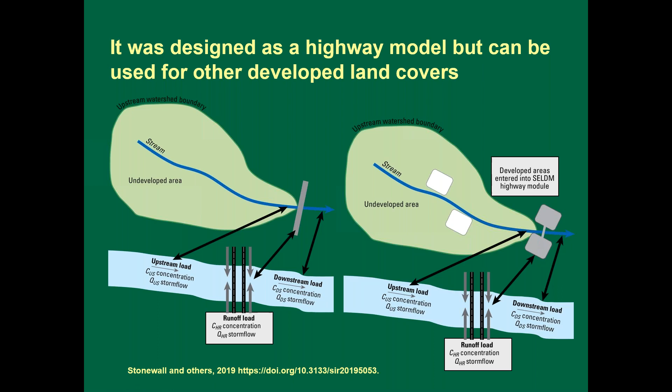So SELDM has been used in TMDLs. We did a study for Caltrans where we came up with yields—that's pounds per acre, loads per unit acre. So then they can use GIS to figure out how much land they own, what the other land covers are, how much of this contaminant they're putting out, and figure out where the state highway system fits in that basin.

So this is the Willamette Basin in Oregon. We did total phosphorus yields and multiplied those by the areas of the different land uses. You can see the forests in that case were about 20% of the total annual phosphorus loads. Agriculture was almost half, and developed areas were about 30%. The entire state highway system was only about 2.5%.

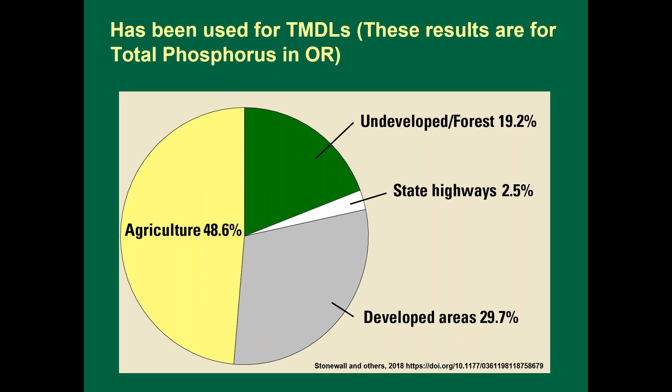So if in this basin they had to reduce phosphorus by 10%, you could rip out all the state highways and not get to your target. So the DOT alone could not satisfy the TMDL. SELDM is the recommended method by the NCHRP, National Cooperative Highway Research Program, Report 918, for doing highway-related TMDLs.

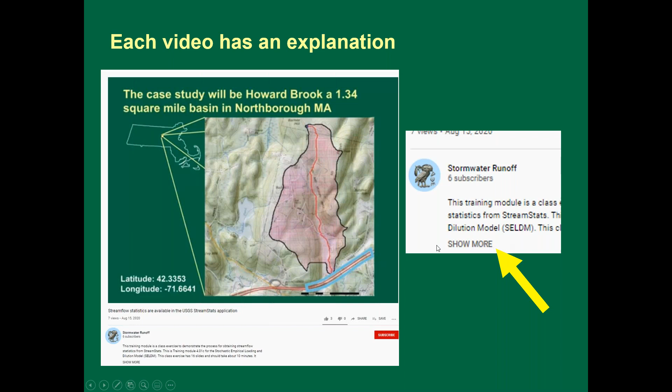If you look at the YouTube page, it may not always be clear, especially on a phone, but each video has an explanation. If you hit the show more button, you'll get the full thing. We tried to put in more information, but also references. If you're interested in something in the video, and it's not a webinar but one of the teaching videos, it should have the references involved.

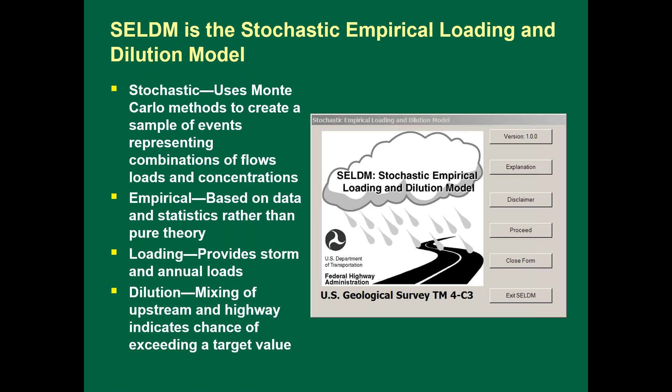I covered this in the intro, but we'll talk about it again because it's important. SELDM uses a simple mass balance approach to calculate flows, concentrations, and loads by storm and by year. So again, you have the upstream load.

It's a random population of concentrations, a random population of storm flows from the upstream basin. You have it from the highway, or if you have an urban area or a highway maintenance facility discharging to a stream—again, concentrations and storm flows with and without BMPs. They add the components together to get the downstream loads and flows, and you divide the load by the flow to get that population of downstream concentrations.

So by getting a population, you can then assess what's the risk of exceeding this water quality criterion, or this loading level I don't want to exceed.

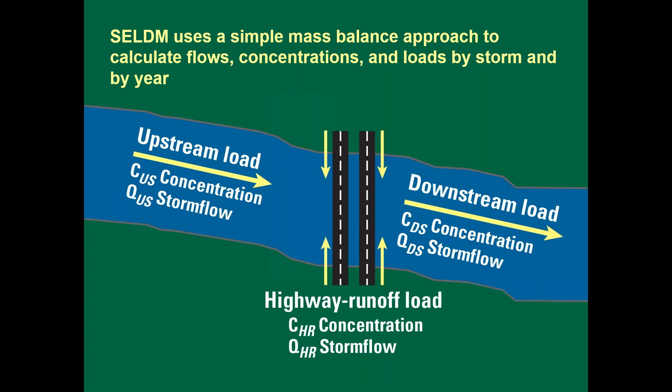Because it was designed for NEPA, but it's also useful elsewhere, SELDM is designed to facilitate what's known as scenario tests and sensitivity analyses.

So a scenario test might be: I have a highway going over 5 streams, so I want to look at what's happening on each stream. Whereas the sensitivity analysis might be: let's say I have high, medium, and low highway runoff concentrations from 3 other sites, and I don't know which one I want to use.

So I could run 3 simulations where everything else is the same, except I vary the concentrations, and see how important that input concentration statistic is in affecting the answer that I get.

So SELDM has an organization for doing the work. First you have a project. Now a project could be an actual highway project that might have several outfalls, or a project where you have different alignments you want to try.

Or like I said, you might be saying, well, if I do this or that, or if I have the pre-development condition, or before I add a lane to this site and after I add a lane, those would be two conditions that might be under a project. So those things I was describing are what's known in SELDM as analyses.

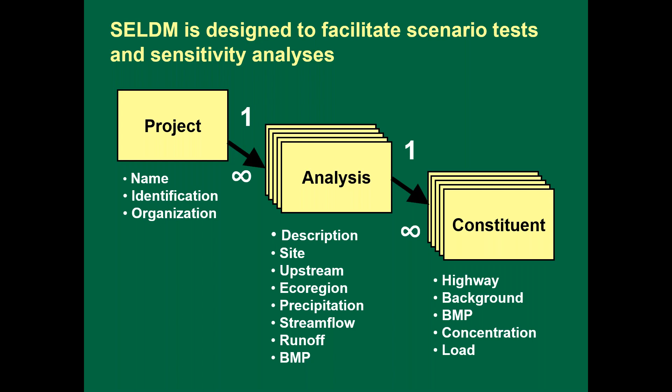SELDM was designed to support the environmental decision-making process, so what we want is a kind of tiered analysis. Like I mentioned, the bridge over the 5,000 square mile river - you may not want to expend three weeks of work to get to the point of... well, you should never spend three weeks doing one SELDM analysis. Hopefully you'll see that.

I guess being a little hyperbolic, but you don't want to spend a lot of time at sites that have a really remote chance of having a problem. You want to focus more on sites that might have a problem and what you can do to mitigate or eliminate that problem at that site.

So SELDM has this first level analysis where you have regional inputs. This is based on hydrologic similarity, so you're saying sites within a region are similar to the regional values. In SELDM, we use the level 3 EPA ecoregions as one of our regions for pre-storm flow, precipitation, and water quality. In the USGS, water quality is QW for some weird reason.

You also can use rain zones - EPA has 15 rain zones across the country. Ecoregions tend to be a little smaller, more focused, so we rarely use the rain zones themselves.

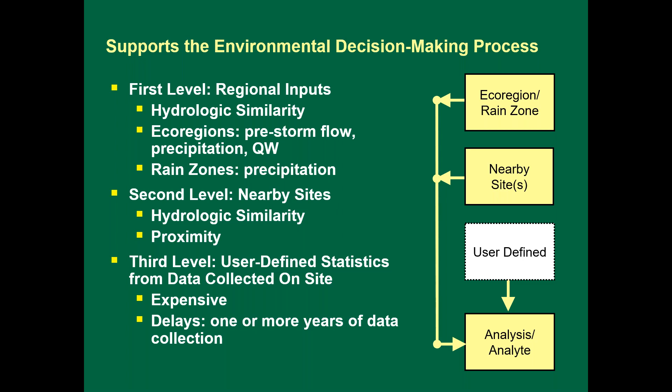So what happens is the same precipitation, the same events, occur to the upstream basin and the highway site.

So for the highway site, we generate a bunch of runoff coefficient statistics. It's not the same runoff coefficient in every storm. You can put in your own runoff coefficient statistics, but generally they're associated with the imperviousness of your highway and your upstream basin sites. So precipitation times runoff coefficients gets you your highway runoff flows.

For your upstream basin, there are 2 components. You have the pre-storm stream flow, what's in the river before the runoff starts. And again, similar to the highway runoff site, you have runoff coefficients based on the upstream imperviousness, and the input precipitation varies randomly to get the flow.

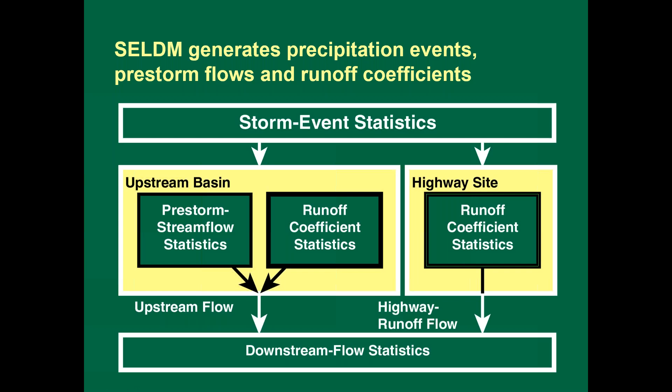So your upstream flow is the pre-storm flow plus your runoff hydrograph, and you add the upstream and highway runoff flows together and get the downstream flow statistics. So it's fairly basic in that it's basic mass balance, addition, subtraction, and division. The power comes from statistically representing the hydrology of the system.

We didn't want to build a model that was tough to run, so we did a lot of the work for you. You need statistics to run SELDM, but we've calculated them and made SELDM a database application, so all the information will be there for you. You can click on things to pick them - there's drop-down lists.

This image shows our precipitation stations. The pastel polygons are the 84 U.S. EPA level 3 ecoregions, and the black line polygons are the 15 EPA rain zones. I generally go to Nevada to talk about this because there's a low density of rain gauges there. You can see we're in rain zone 11, which covers a lot of ground, but a lot of arid ground kind of inland there.

This pinkish pastel ecoregion is the basin and range ecoregion. So if I was in this area of Nevada where you can see these 3 rain gauges, I could either use the average or median of statistics from rain zone 11, from the basin and range ecoregion, which would be the average of all these dots. Or if my site's here, I could say my site is most like one of these 3 dots, or I could take the average and median of the 3 dots.

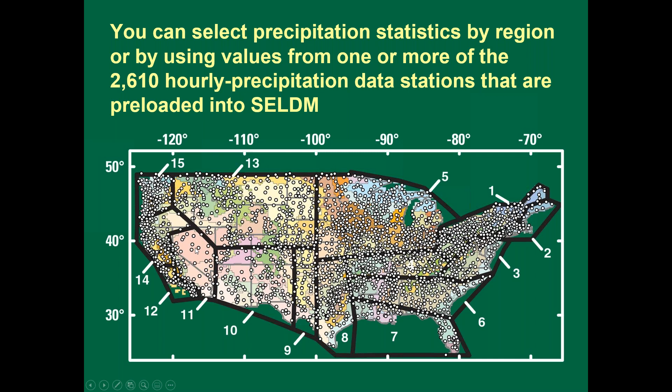Similarly, we did statistics for you from 2,783 stream gauges and preloaded them into SELDM. After SELDM was developed, we did statistics for about 20,000 stream gauges nationwide. So if you go to StreamStats in your state and click on a stream gauge, you will get the SELDM statistics for that stream gauge, and you could enter those into SELDM.

Similarly, we didn't use rain zones for stream flow, but if you look at Nevada, you can see this little cluster of sites in the middle of the state. If I'm in this area, I can either use the average of the basin and range stream gauges - looks like there's 4 stream gauges here - or I could pick 1 or 4 of these to try and get my stream flow statistics for this site of interest.

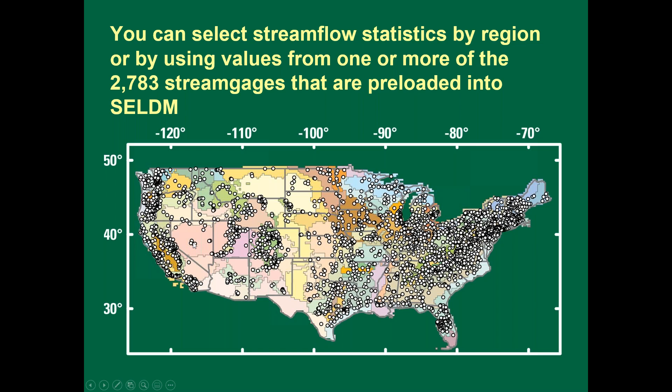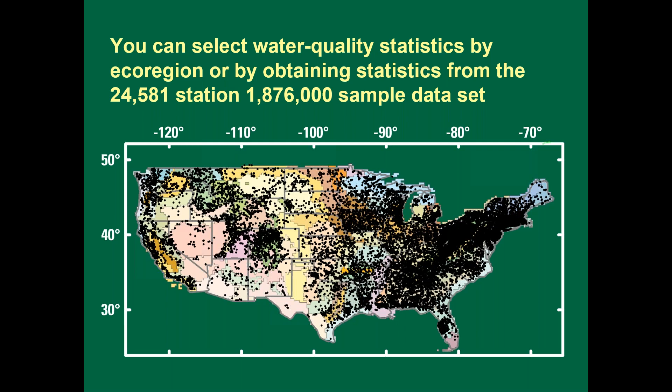For background water quality statistics, we did data mining from the USGS National Water Information System, and we've got about 2 million samples from 24,581 water quality monitoring stations nationwide. Unfortunately, not everything was measured in every station. Total phosphorus and suspended sediment are the top 2 nationwide - about 30% of these stations have one or both of those constituents. Once you start looking at total metals, you get down to about 10% of stations nationwide that might have copper, if you're interested in copper.

Back to hydrology from water quality - so SELDM is generating these events. It's generating the pre-storm flow. So when we look at a runoff hydrograph, it also simulates the timing of runoff, but it does it in a fairly simple manner.

It uses a triangular runoff hydrograph. So we can see in this diagram on the left, we see runoff volume and time. The pre-storm upstream flow stays constant, and we have this triangular upstream runoff. That's the duration of the runoff hydrograph, and that depends on the length and slope of the stream basin and the imperviousness of the upstream basin.

Let's imagine the lower left shows 2 runoff hydrographs: the short, sharp peaked one is highway runoff, and the longer, lower triangular one is if you put in a BMP. If you have this upstream runoff hydrograph alongside the highway runoff, at duration 1 you're only in the rising limb, whereas with a BMP that stretches out the highway hydrograph, you get out to duration 2, so you get more dilution. We didn't want to cheat and say the highway gets all the dilution from the upstream basin - it only gets the portion that would arrive while the highway was discharging.

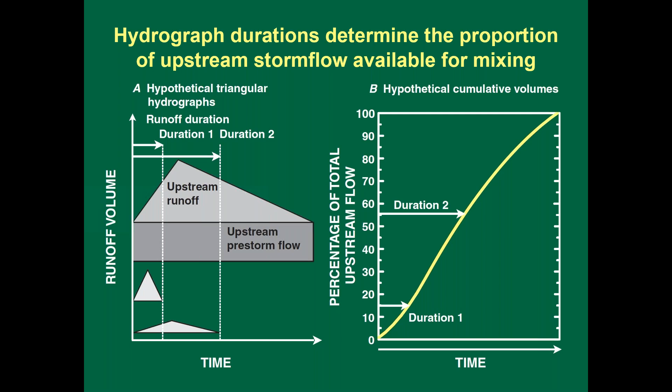SELDM was developed as a highway runoff model, but it can be used for many types of sites. When we put in our highway site, SELDM is simple to use because there are just 5 properties we think about - actually really only 4 properties.

What we need is drainage area. In this picture of these 2 bridges on the Charles River, we see the drainage area - if only the bridges are draining to the stream - is encompassed by these 2 yellow polygons.

To get the timing of the runoff from the highway, we use the main channel length and slope. For a bridge, the main channel goes from the crown of the road to the scuppers, and the slope is the camber of the road from the crown to the scuppers.

The other thing we look at is the imperviousness to get the runoff coefficient statistics, and we see the bridge is 100% impervious.

Then we look at a literal site versus a conceptual or hypothetical site. When people are worried about water quality in this stream, they're not necessarily worried about what's happening between these 2 bridges on the same highway - they're more likely worried about what's happening downstream of both bridges.

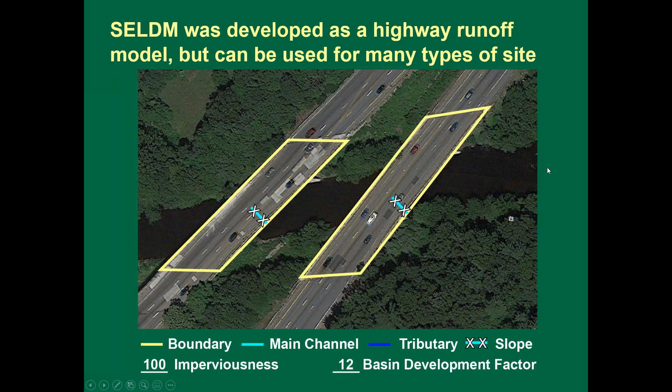So again, it's just a drainage area, imperviousness, the length of the main channel, and the slope, the main channel slope between points that are 10 and 85% up the channel.

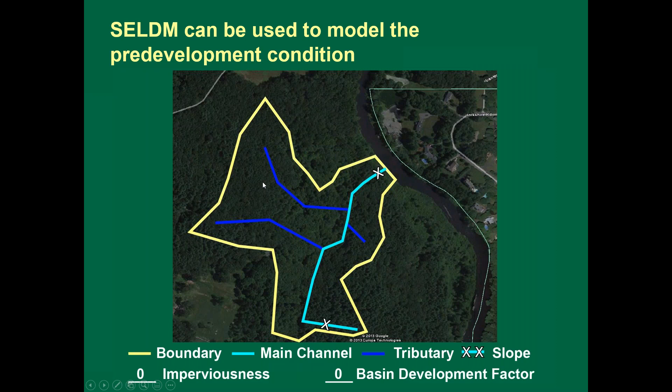Let's say there's a roof drain and you've got just a vertical drop down into the sewer system, you wouldn't really count that part of the fall because the flow is instantaneous.

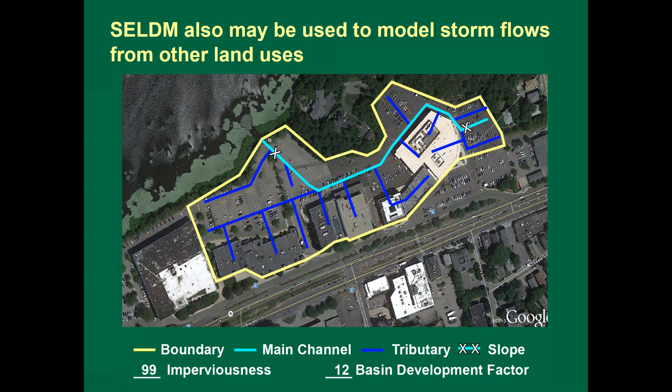So today, hopefully we'll get through a case study. It will be Howard Brook, a 1.34 square mile basin in Northborough, Mass, near where my office is.

So we're going to be trying to run SELDM with this section of 290, which is within the blue polygon, and it stretches from drainage divide to drainage divide, and we're assuming all this area gets into the stream right here. This is an image from an older version of StreamStats where the black line is the basin divide and the red line is the main channel.

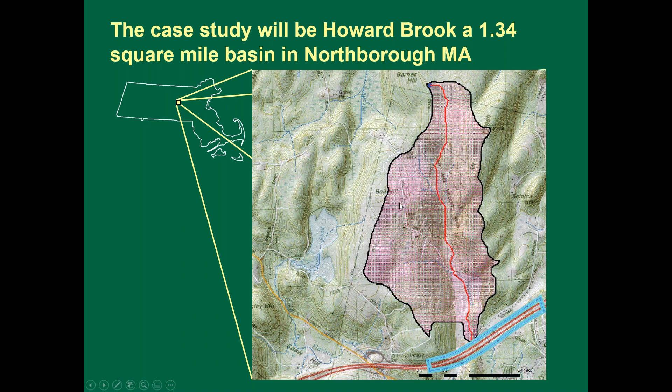When you run SELDM, it generates thousands of storms, or 1 to 2,000 storms. This is for Southern Massachusetts. We used highway runoff database information from a Massachusetts study, so we put these statistics for these highway runoff sites into SELDM. It runs all these events and we get this population.

So when you're looking at this graph, the vertical axis is total phosphorus on a log scale, and the horizontal axis is a probability axis. You can see it's kind of weird that 98 and 99.5 are close, but when you go to 99.99, there's a large space. So the probability axis stretches out the extremes, because that's usually what we're worried about.

So the gray circles are the highway runoff, total phosphorus from the pavement surface. We can see that rarely we might get up to 1 milligram per liter from the pavement surface, and in a few storms we get down below 0.01. We're not simulating individual storms, but conceptually that could be you have a gully washer that rinses off the highway, then another event afterward where there's not much buildup, so you could get low concentrations.

So these yellow diamonds are the concentrations you would get out of a grassy swale. We can see that the grassy swale doesn't make a huge difference in the concentrations, and when highway runoff concentrations are low, the grassy swale could be higher than the highway runoff concentration. That makes sense: if you have quote unquote clean pavement and the runoff is running over grass and dirt in a swale, you might tend to pick up some phosphorus.

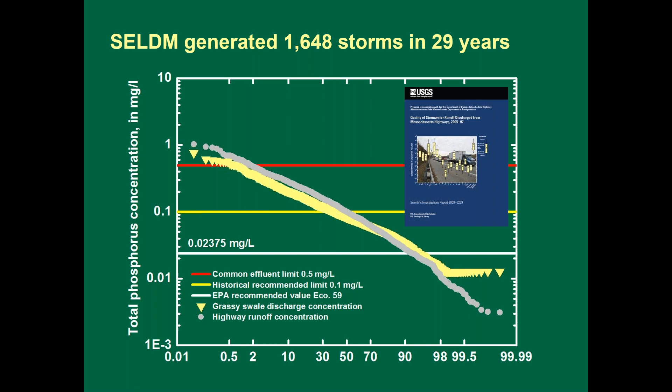However, if you apply the same standard they're applying to municipal dischargers to the highway, you can see highway runoff is going to exceed that maybe 3% of the time, but if you put in a grassy swale, it drops it down to about 1% of the time. So in terms of concentration in the effluent, the next question is obviously, what's it going to do in the stream?

SELDM gives you that information as well. SELDM provides background water quality concentrations, and you can simulate that. What we have here, the blue stop signs, are the regional values in SELDM for total phosphorus in the Northeast region, Northeastern coastal zone. We see there's these different stream basins that we have data for. This one down here is actually the lowest one, is the outflow from a large drinking water reservoir, as if they had a big wet pond treatment with a 6-month residence time. This is the phosphorus you would get from that.

Again, we simulate all these events with the available statistics, and what we get is this population of events. We can see that based on regional statistics and these 3 streams shown in yellow, if you're applying that 0.02375 milligrams per liter, even the best stream is going to exceed that about 70% of the time. The regional values would estimate about 85 to 90% of the time, and then this one tributary exceeds this standard more than 99.5% of the time.

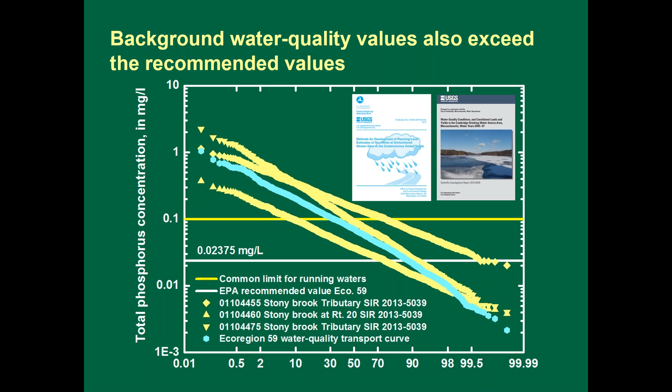So what we're showing here, we just showed you highway, then we showed you upstream, and this is what happens downstream. Again, we have our total phosphorus on a log scale, we have our probability scale. The blue stop signs are upstream, and the green triangle pointing upward is downstream concentration without a BMP. The yellow triangle pointing downward is the downstream concentration with a grassy swale, and the highway runoff concentrations are gray.

So we can see that at the lower concentration, from green to yellow, there is a shift from left to right, reducing the probability of exceeding. But the highway runoff concentrations aren't that much greater than background concentrations, and although there is a shift, you're still exceeding this lower standard 90% of the time.

You go to 0.1, we can see that the highway exceeds more, but the upstream, downstream, with and without BMP isn't making a big difference.

And then you just follow the probabilities up to the highest concentration. You can see at this site, putting in a BMP is not going to make a big difference for total phosphorus. So if you only have so much money to put into BMPs, you might be wasting your money here. That's not to say that for total copper it might be a totally different story.

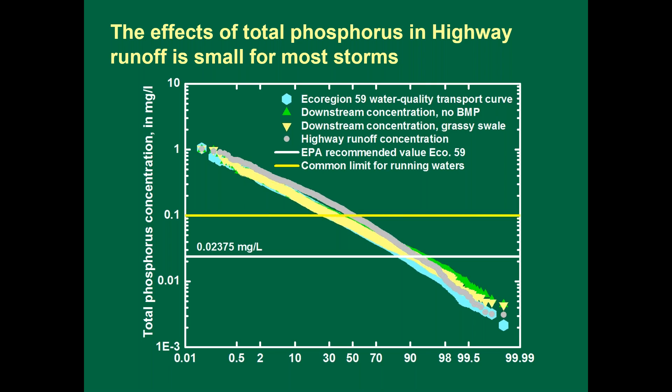All right, and so this is a schematic of the Scituate Basin. When we're talking about sites, if you're looking at annual loads or a lake analysis, your highway site can be more hypothetical because you're not looking at event by event, so you're not worried about the timing of runoff for individual events.

So if you had like a reservoir basin, or if you're looking at, let's say this was an estuary and you were looking for the total highway runoff concentration of some constituent, then you would use maybe the whole highway area.

So in the Scituate Basin in Rhode Island, if we're looking at chloride, for example, when chloride gets into the groundwater, it gets into the Scituate Reservoir sooner or later. So if we're looking at long-term loads and yields, and what's going to happen over a long period of time, we'd probably use the whole road network area to figure out how much chloride is going to end up in the Scituate Reservoir.

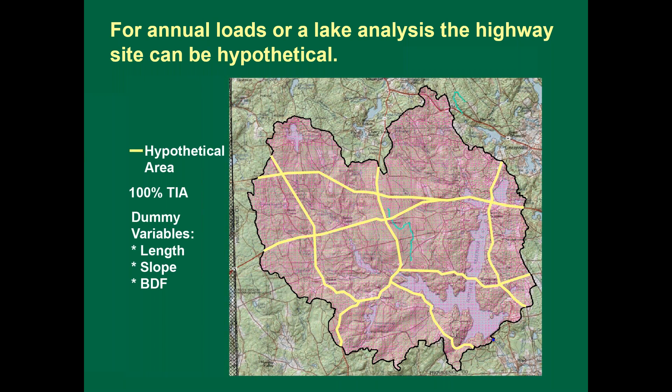You're getting some good infiltration. So between knocking down the highest concentrations that you would see and knocking down the flows, you get like a 50% reduction in load. SELDM is kind of good at this - if you look at the International BMP database, they do a great job of looking at concentrations, but they don't really address loads. So SELDM helps you put all that information together to get a better answer.

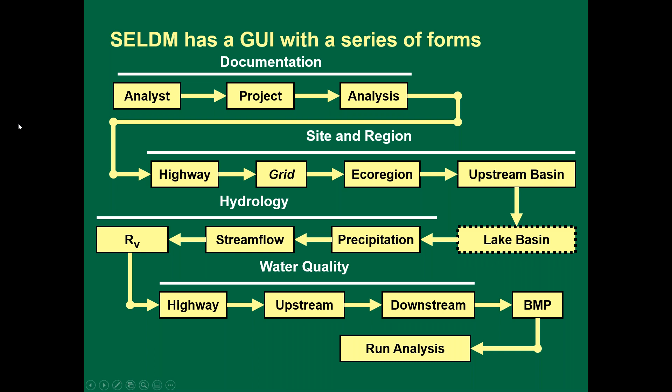This conference will now be recorded.

Okay, great. So SELDM is a database application. We did that so you wouldn't get bogged down building these complex input files or entering a huge amount of data or statistics. And once you set something up, it would be self-contained. So if you're doing something that somebody else has to review, you can give them this one file and it should run for them as it runs for you.

So when you open up SELDM, it's a Microsoft Access database application, and you can see it's got this little cute opening screen. It gives you information about the version. If you click this button...

We have our explanation. One thing is, consistently, it comes up and it's highlighted this way so you can copy it in. You can go large font, which is just kind of a toy, I guess. But as you move through, if you have to write a report, you can copy stuff right out of the explanations and use that. So this just talks about SELDM itself, but I'll show you more as we get in.

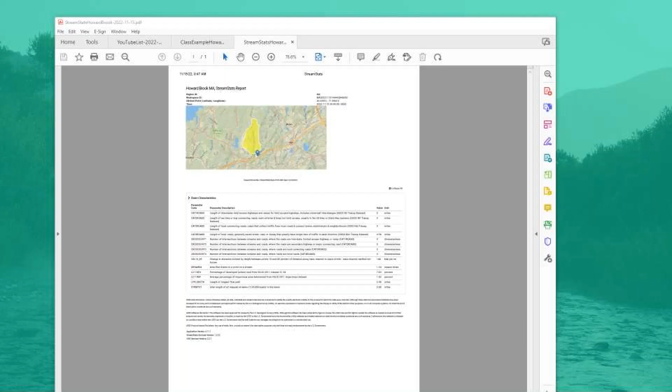Okay, so your highway site characteristics. Let's see, hopefully I left some of this... In the folder that I directed you to, there was a folder called First Run, and we could see there's a class exercise.

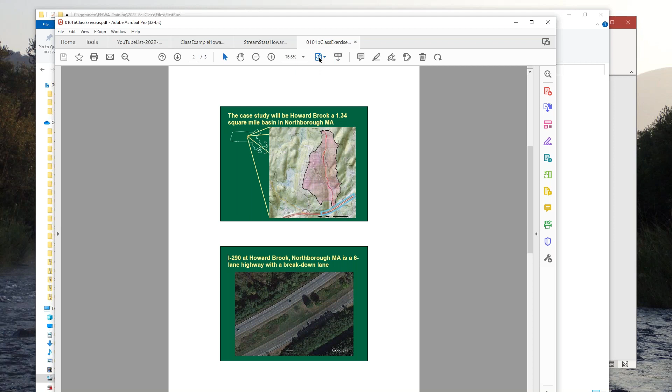So this is a presentation, but I wasn't going to give it, but let's see. So basically, I showed you the map of I-290 and Howard Brook.

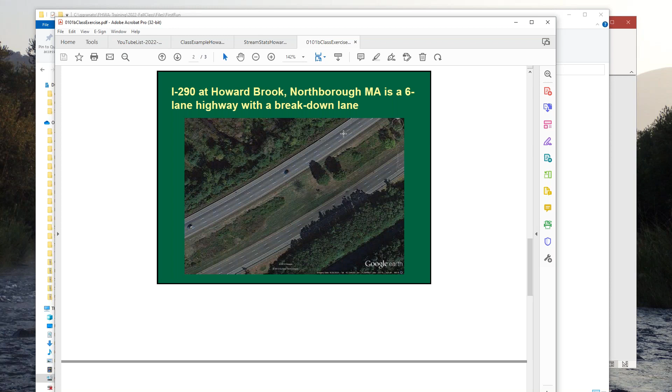Basically, what we did was, in most areas, if the highway is existing, you can go to Google Earth and use the measuring tools there. We can go through that on Thursday if people want to dive deeper. But you can get, hopefully you have highway plans, but if you don't, you can use Google Earth to figure out what your highway site looks like.

So what we end up with for basin properties for the highway: we have latitude and longitude, area, channel length, slope, impervious fraction, and originally we did this basin development factor, but we're going to use that cheat code to use imperviousness for our basin development factor.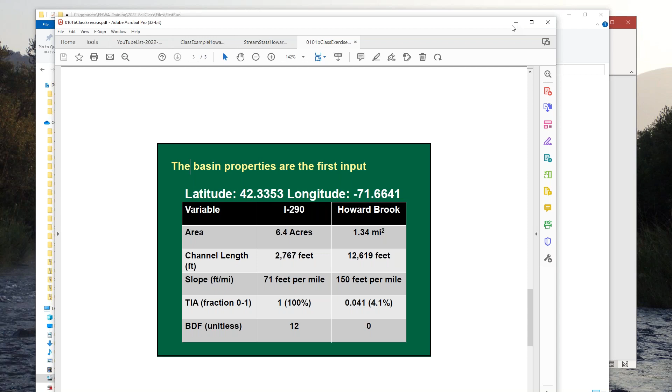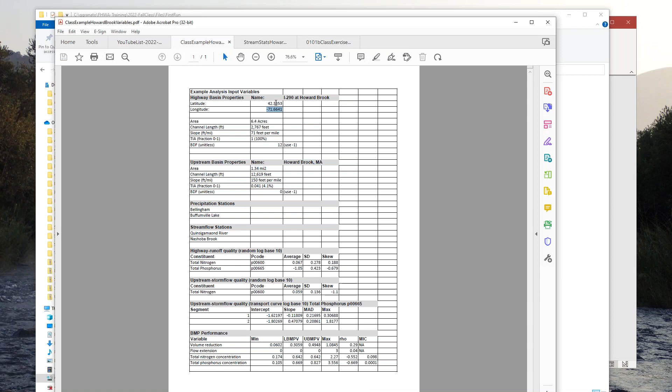If you open up the class example, Howard Brook, we've got all the variables that we'll be using in terms of basin variables and water quality, etc.

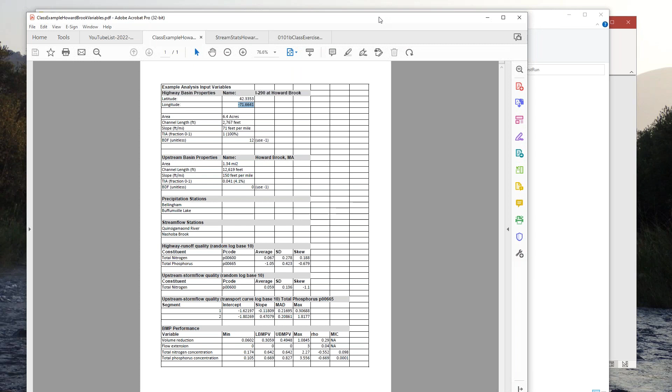So I'm going to move this off the screen. Well, actually, I could probably fit them both, right? Maybe not. But if you open that file, class example, Howard Brook variables.

So if I do, my name is I-290 at Howard Brook, that's my short name. I can copy this. Now, if you guys use, like, if it's an existing highway and you have a mile marker or whatever coordinate system you want to use, that could be part of the site name.

So I'm just pasting in my latitude and longitude from that file. Now this latitude and longitude, I put in precise values typically so that you can click on a point on StreamStats and get the same answers. But in reality, your latitude and longitude only need to be within, I don't know if I'm aging myself, but within a USGS quad sheet, like within a quarter of a degree. But for documentary purposes, it's good to get the exact point where the stream will cross the road. And nowadays with Google Earth, it's pretty easy to get those locations.

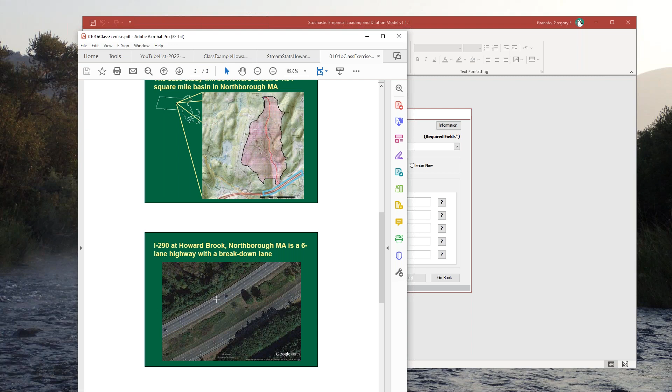I guess if we look at, so I-290 is a 3-lane highway with the breakdown lane. So basically that's like 1, 2, 3, basically just simply that's 4. So if we look at 5/4, it's 1.25 times the area, and our original area was 6.4. So if we add 2 lanes, we're going to end up with 8 acres of highway pavement draining to this.

So I've entered all this, but it doesn't take effect until I click this copy site. And again, it just tells me I used the -1. So we're just going to go through here with the original highway, and we'll hit proceed.

So I guess if I looked at this, you could see what did we just do? We just defined a new one, and then we copied it and just modified the thing that we're going to change.

So this is a nerd form. It's just the review geographic information system grid specifications. So what people usually forget is they forget to put the minus on the longitude. So you end up over on the other side of the world, and we don't have precipitation or stream flow data over there, or water quality - well, I guess they probably have their own ecoregions. But if you come to this form and there's a big red error message that says you're outside the grid, then you just have to modify your latitude and longitude to get inside the grid. Again, usually it's that this number, the longitude, has to be a negative number.

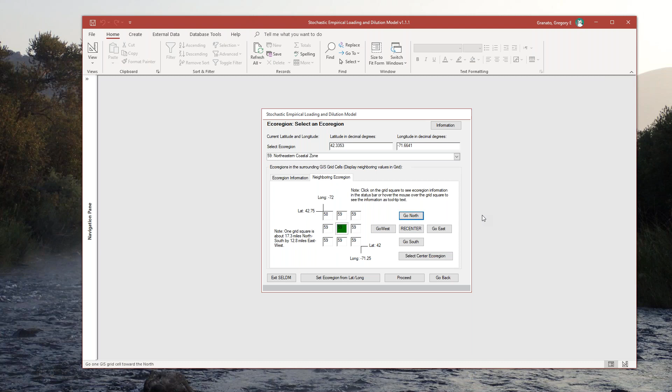So if my latitude and longitude was here, but I think that my basin is more characteristic of the highlands, I might manually choose or specify that I'm in that ecoregion rather than this ecoregion. If I do that, it will give me a warning. But for the purposes of today, we're going to keep going with the default ecoregion based on our input latitude and longitude. The other thing that might happen is to select the ecoregion, we're doing everything on a 0.25 degree grid square, so a 1/4 of a degree latitude and longitude.

The original ecoregions, if you look at the map, they're lines, they're not gridded. But I talked to Dr. Omernik, the guy over - I forget which agency he's from - but he said, you know, we made lines on the map for the ecoregions, but they're not really strong boundaries in most places. They're just kind of diffuse, amorphous transitions between one ecoregion to the other. So even though we might be on a line, the case for choosing another one might be that you feel like you're in that other ecoregion. All right, we've selected the ecoregion, so we proceed.

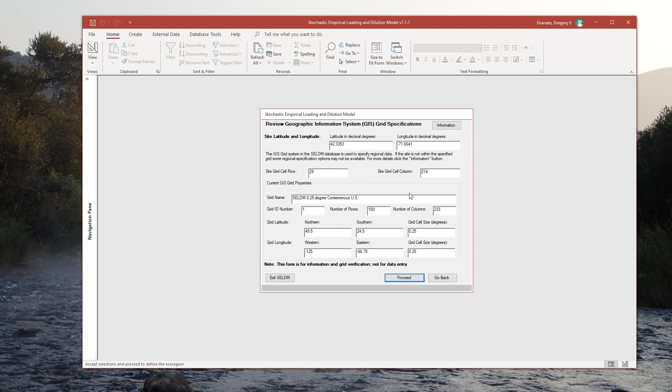If I forgot something, I can go back to the previous step. If I've made a mistake, I can go back without accepting, and it will get rid of my choice. So right now we're going to specify the upstream basin.

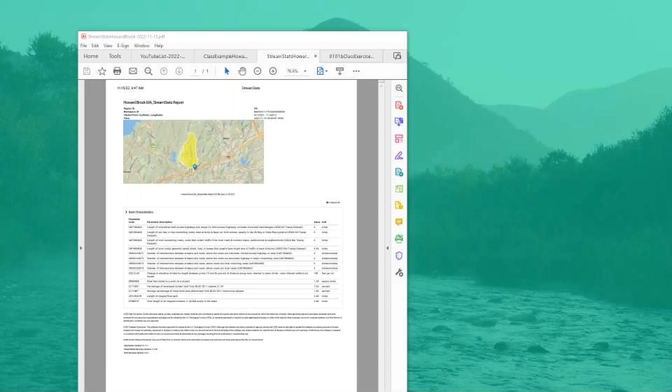If we look at the StreamStats output, here's the StreamStats report. It gives you the drainage area, the slope, and the length of the longest flow path.

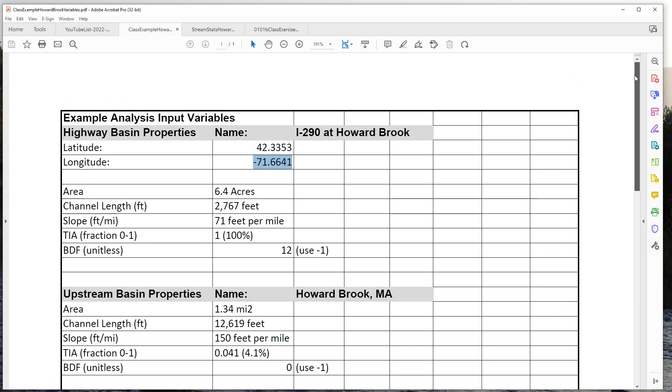Or in that directory I put up on the file share site, we have our upstream basin properties. Our area is 1.34 square miles. Our main channel length was 12,619 feet. Our slope was 150 feet per mile. Our impervious fraction is 0.041. And this basin development factor, we're going to use -1.

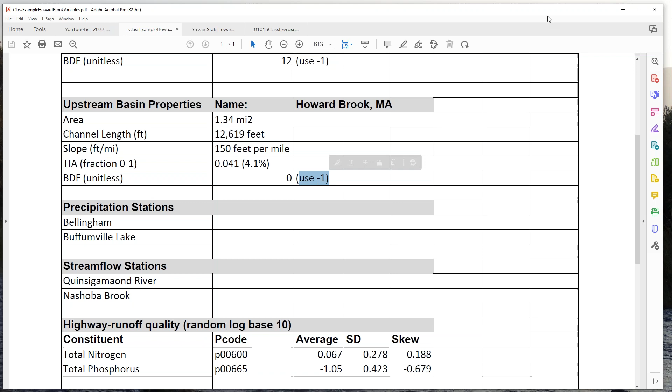So I'll put this over to the other screen and just copy the values in here. This would be Howard Brook at I-290. Again, I can put in full names, brief descriptions - they're not required. So what do I need?

I need a drainage area, a length in feet, a slope in feet per mile, and an impervious fraction. And again, our basin development factor is going to be -1.

For the upstream basin, we also needed to give information about the hydrograph shape for that basin - basically the hydrograph recession factor. It's the ratio of the falling limb of the hydrograph to the rising limb. We'll use the default values: the minimum is a 1-to-1 hydrograph, so the falling and rising limbs are equal. The most probable value is 1.85, so the falling limb is almost twice the rising limb, and our maximum is 4.4 times, so the falling limb is about 4 times. That gets stochastically generated from event to event.

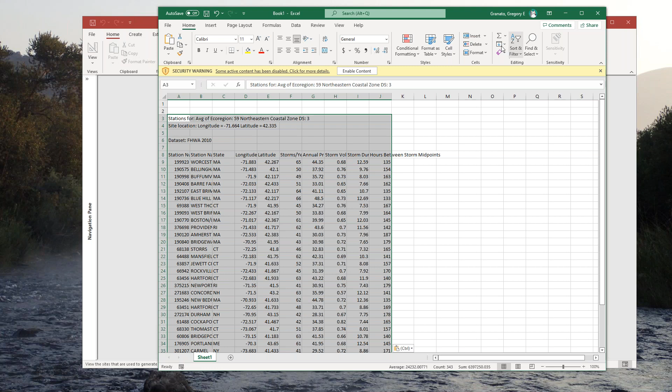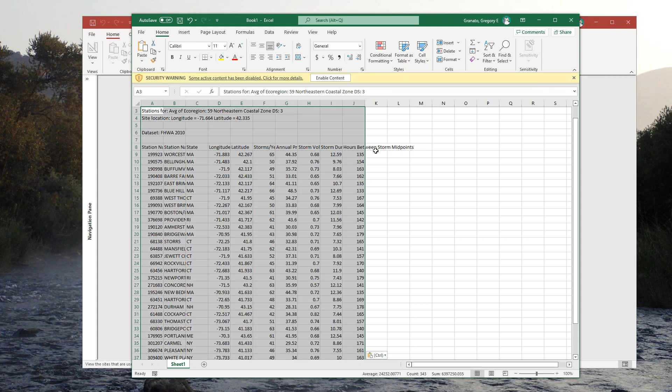If I bring it over, this is designed to be tab delimited, so it kind of looks ugly in the text format. But if you drop it into Excel, you can see here's all the rain gauges and here's the statistics each one provides.

Now, I made it sound like the jump from a level 1, which is just using regional data, to a level 2 was high, but actually it's pretty easy to do. In this case, I'm going to enter a new definition. I'll say yes, and I have user defined, and I want to do a selected station average. So I'll pick that, and then I'm going to generate and examine the statistics.

What this does is it allows me to pick nearby rain gauges. They are listed down below in the order of proximity to my site of interest. A common theme in the SELDM world here will be that the things you get to pick from are usually in a lower window, and once you pick them, they go to the upper window. So you'll kind of see the pattern.

We can see that the closest one is the Worcester Regional Airport, which has 65 storms per year and about 44.35 inches of annual precipitation, runoff generating precipitation. Whereas Bellingham is the next closest and gets 50 events per year. That's a pretty big difference, and that's a big difference in precipitation. This is where I know something about Worcester. It's kind of up on a high hill, so it kind of scrapes a lot of rain out of the clouds. So that's not really representative of my system.

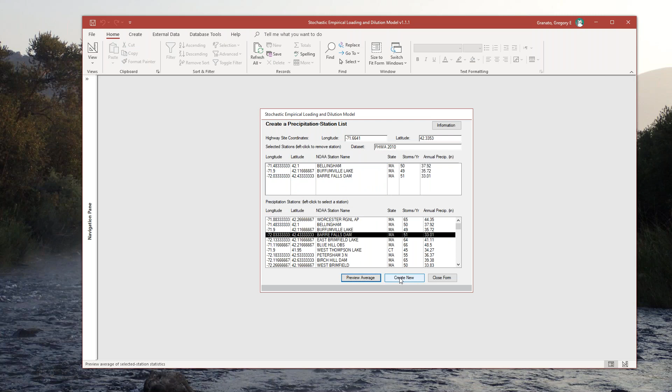Once I pick the three, I can preview my average. So these will be the statistics I get. And now I create new. It says, do you want to update these? It tells me what will happen. And so it comes up with Federal Highway 2010, which is the data set. It says average of 3 stations, and it gives the date and time today. So I'll just leave it at average of 3 stations near Northborough, and I'll say okay.

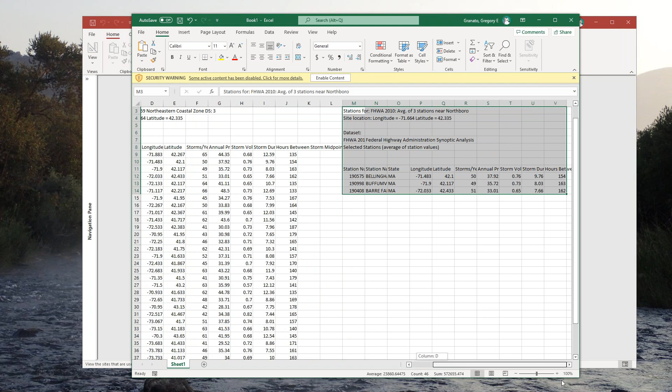And now you see I have my ecoregion values, and I have the closest, well, not the closest 3, but 3 representative stations. And now if I view related sites, that window pops up, and if I paste this in, you can see that, okay, there's the statistics for the sites that I've chosen. Okay, let's proceed.

And now we did precipitation. Now it comes to stream flow. And we're just going to do the ecoregion average here, generate, examine statistics. Yes, accept updates. And again, I can enter a new definition and then pick stream gauges. I guess I could do that really quick with a lot less explanation. So I do selected station average, generate, examine.

So Howard Brook was 1 square mile. I might not want to use one of these 110 square mile basins. Let's say I'll take the average of Quinsigamond, which is close, and Nashoba, which is a little farther away, but it's a smaller basin. And if I create new, average of 2, I just say Quinsig.

You don't necessarily need to follow me on doing these examples. You could just use the ecoregion value, or it's easy enough to click enter new, selected station average, and then go. So you could see that is easy to do, but you want a little engineering judgment on which one you pick.

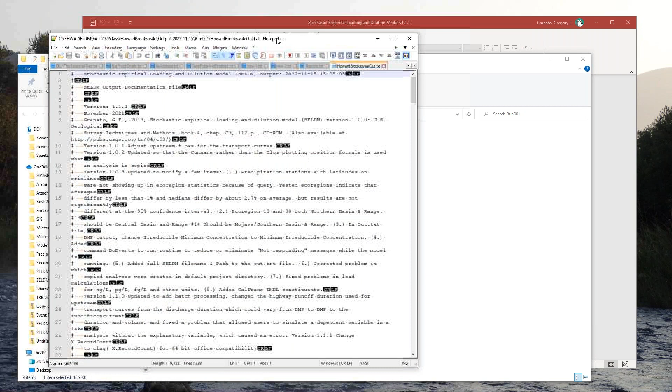So if you open this up, you can see the date and time stamp there is the same as the file timestamp. And that's again just for, EPA was concerned that people might be changing their answers if they didn't like them, or I don't know.

So let's go back to the analysis form and then I'll let you go very quickly thereafter. You can see we can go to the precipitation form or the BMP form. So if we go back here and we have our analysis, so we just copy this analysis, yes.

And let's call this one, I guess, wet pond. Wet pond, maybe 2 words. Okay, then I copied the analysis. So we can see now, because we copied it, we have all that information. So we can close that.

And now we just have to click all the way through this because we already specified everything. So we said this one's going to be wet pond. We're already at the BMP and I guess not wetland basin, but I guess I should have called it retention basin, right? Retentions are wet. And I can go back and change the name of that, but we won't right now.

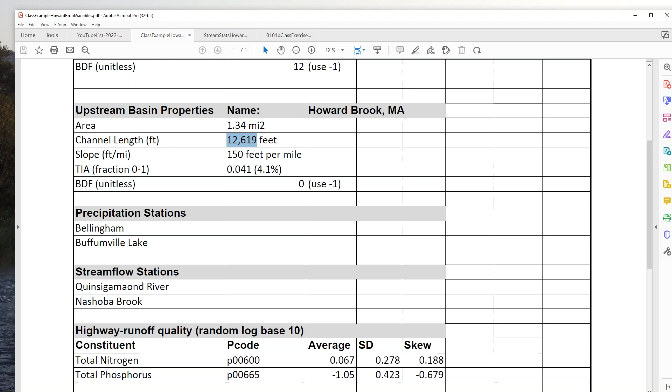All right, I think so. We've gone through an example. We kind of did the introduction. I guess I will stop recording, and we can, if anyone has any questions, discuss anything or go back to any particular form you want to look at and ask a question.